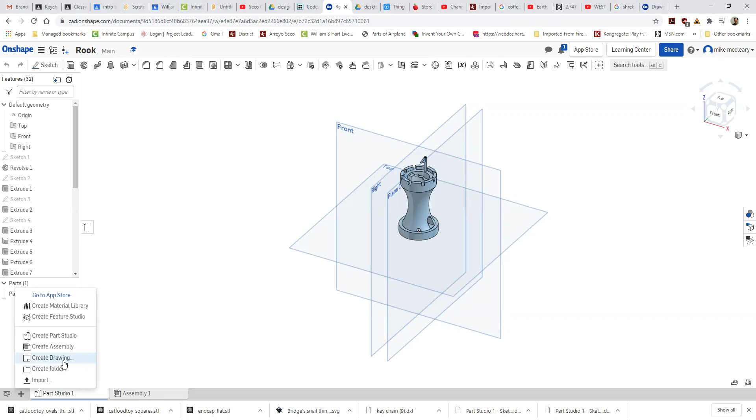Let's go. Why is it not showing me that? Here, there we go. That's the view it should show.

You're going to want ANSI A inches. In the future, you might want ANSI millimeter if we're doing the cell phone case, which is in millimeters. But as long as you're drawing in inches, you're going to want inches.

You might wonder what's B, C, D - those are different sizes. A C scale drawing would be about the size of a desktop, 22 inches by 17 inches. B scale is 11 by 17. A scale is 8.5 by 11. So you could actually print this out.

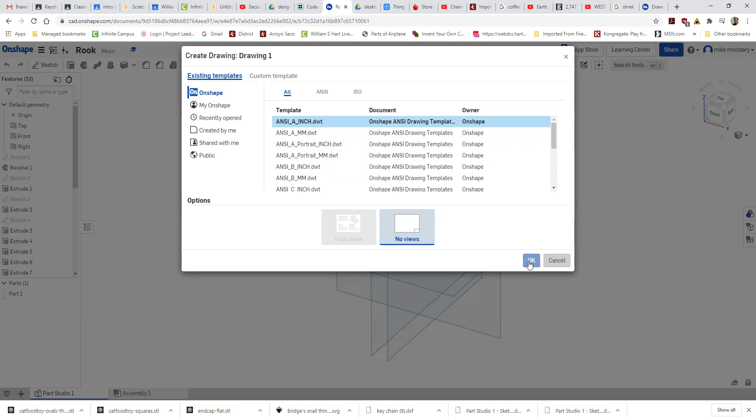So we're going to hit OK. And it starts out here with wanting to make an initial view.

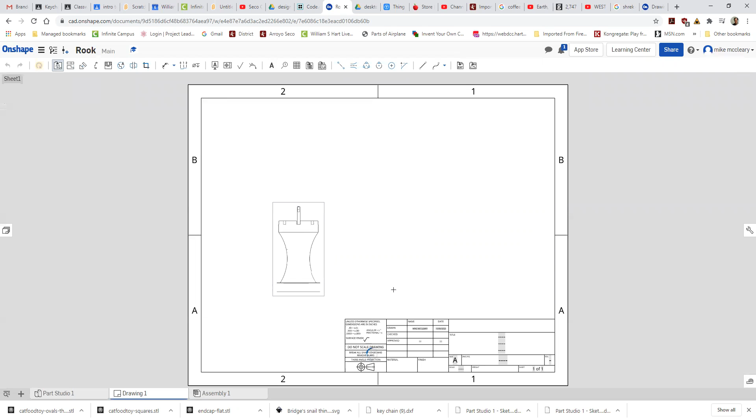I'm just going to click on part 1, which is my rook there. And there's an initial view. I can go through here and click again for a side view. Oh, and it doesn't continue on, but I click on the original view and I can make another projected view.

Ta-da, there is a right view, a front view, and a top view.

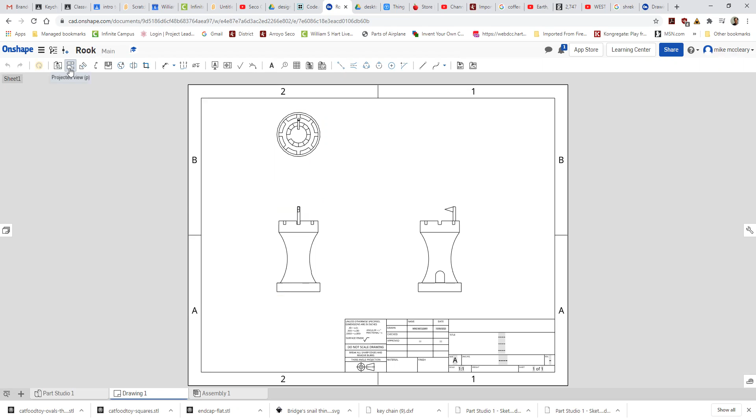I'm gonna need one more here though, that I didn't show you how to draw by hand because frankly you didn't have the graph paper - an isometric view.

Ta-da. There are the three orthographic views and the isometric view. So this is a multi-view sketch.

However, we're not done. We need to make sure that it is dimensioned. The dimensions that are put in the assignment need to be dimensioned.

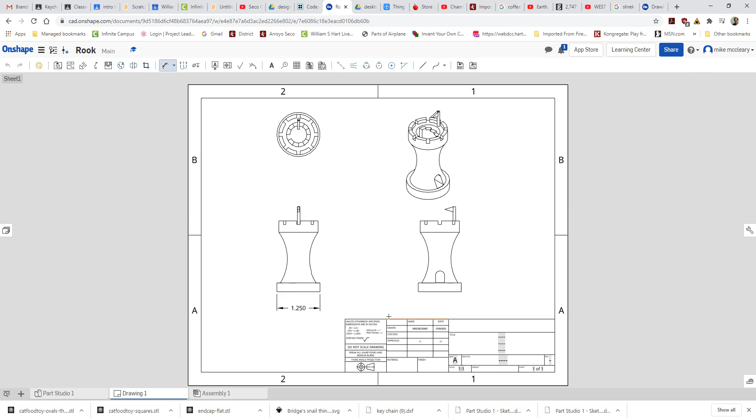Let's say that the base is 1 1/4, or that we have a 1/4 inch lip, or that the height of the entire thing is 2 inches. We could go through and say the height of the flag is that.

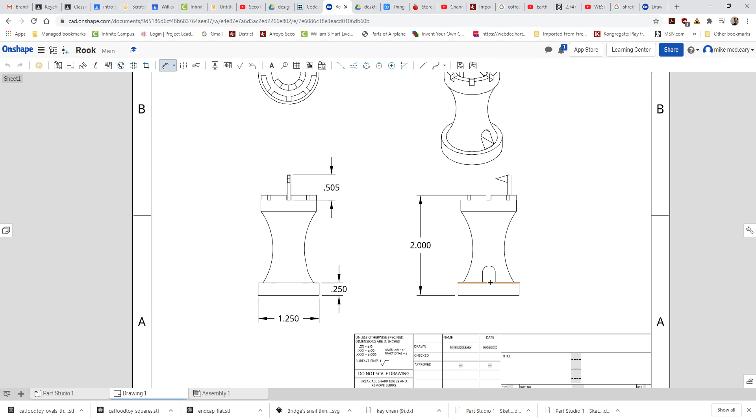But frankly, that's not important. The ones that I have specifically mentioned in the instructions, those ones need to be there.

Or for the cell phone case, I'm going to make another one of these for the cell phone case with which dimensions you should be using.

That was a little rough on my cell phone case. Okay, I can print another one later.

All right, so other things that we should go over here, and let's get out of dimensions. There's stuff over here in the title.

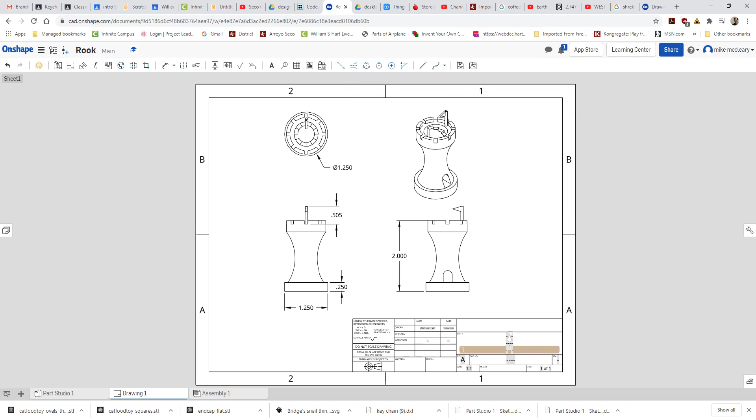Now, one thing that's nice about this program is it will put your name in there. The program I normally use puts your ID number in there, which is not as fun, but this one puts your name in. But we do need a title.

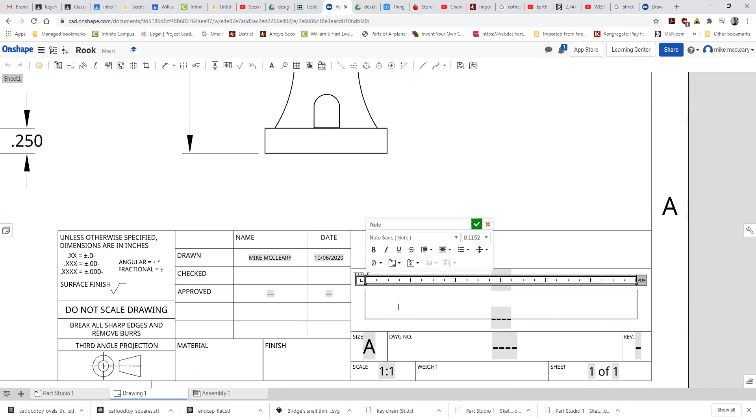Let's say this is a - double click. We say this is a rook with stairs.

I'm just going to take another one of these and put it over here to material. Let's call this one black.

Classic is actually true black PLA, but black will do for now. We'll go through what the colors actually are later, when we do the cell phone case version of this.

I'm gonna get rid of the extra ones. We don't really have much of the stuff.

So in this title block, that's what this section is. We have who's drawn by, and it'll autofill your name, which is nice, and when you actually did it. You don't have to have your work checked by people, so it's fine.

If you were in an actual job, you would have someone check to make sure you didn't mess up, and then you would give it to your boss, the equivalent of me, and they would go through and make sure it is approved before it goes into production.

But we do produce it with a 3D printer, so you don't need the extra signatures.

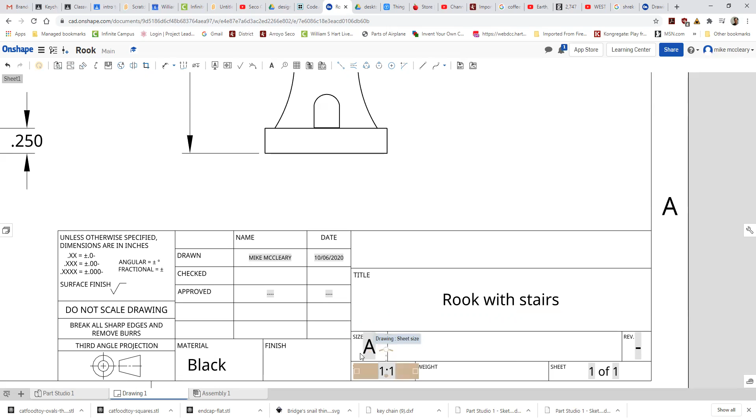The size, it's 8.5 by 11, normal printer paper size, so it's A. Drawing number, you don't have to worry about that. Revision, you're not revising it.

Well, you might revise it, but you're just going to turn it back in again. We don't need to have a revision number.

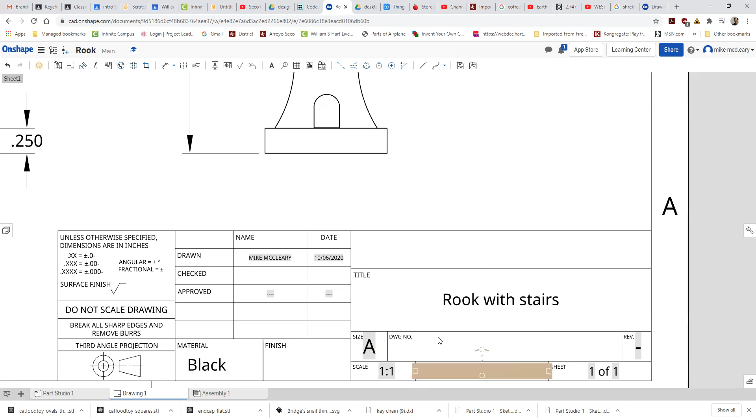We are not weighing it, and this scale will change automatically, and you will probably need to have a different scale when we do the cell phone cases. This one is just left blank.

There's some stuff about tolerances, which you're going to pretty much ignore. And here we go - when you do dimensions, make sure they don't cross each other. They should be clean, easy to read.

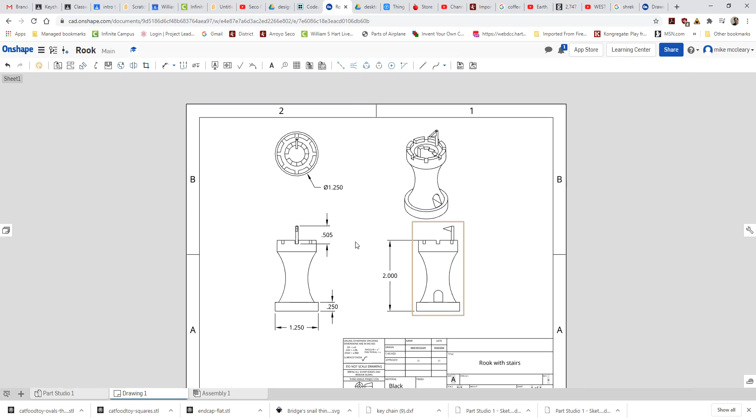Anything that would be important to be able to make the thing, you should probably do. But if you don't have all the fine details, that's fine. So like, I'm going to put the gap between there.

And I'm going to put - that one, complaining - this one.

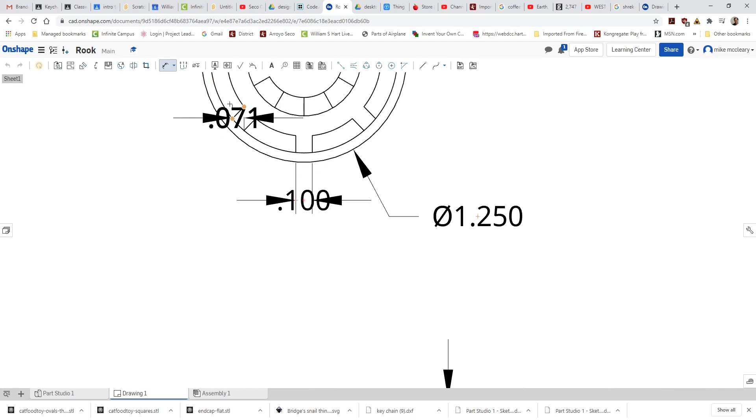Frankly, at this point, I want to make sure they look nice. If you take this in the high school version, they spend a little bit more time making sure these are all properly done and that you could actually make the thing.

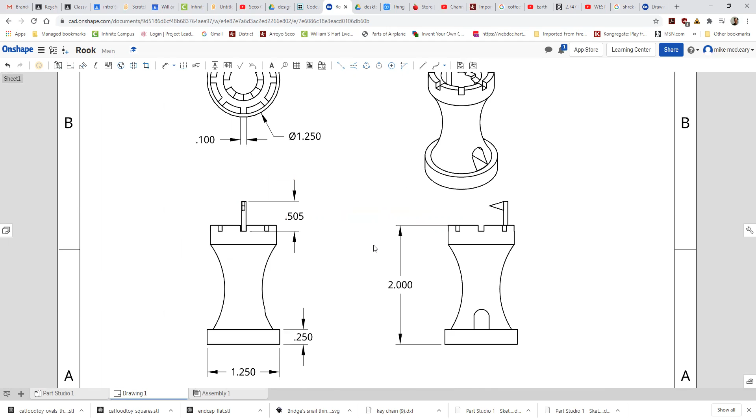I want you to just be able to make the orthographic drawing, not necessarily the part that you're drawing in here. So once this is done, here's one extra thing you can do that you couldn't do on previous ones.

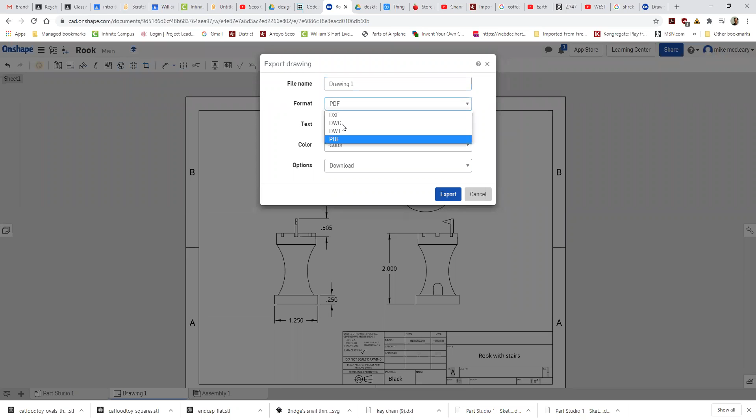Right click, you can export, and one of the formats is PDF. I think the default is DWG, which is the format for these in AutoCAD, which is the equivalent of what you would be learning here if you were in person.

But PDFs, everyone can read. You get to export it, and it should appear at the bottom.

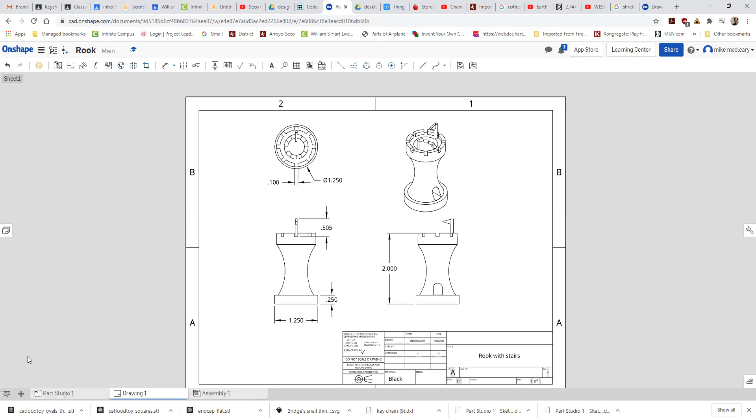Oh, here it is. We'll look at this. And there it is, an orthographic drawing.